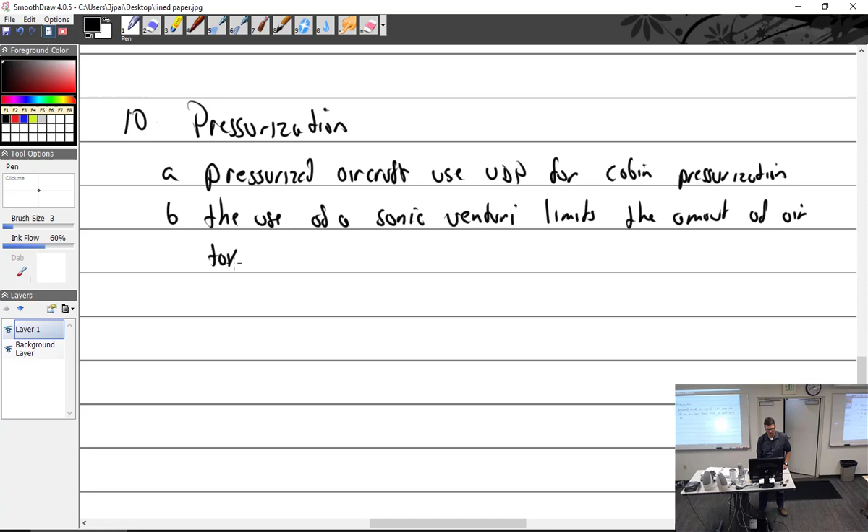Also, upper deck pressure may be used to pressurize magnetos.

So if you have a pressurized turbocharged aircraft, now you're talking about going high, especially if you have a pressurized cabin. Now you're really talking about engines capable of going high, people capable of going high. But the magneto, that's going to be the weak link, because as you get up in altitude and the air is really thin, the air is the insulator in the magneto. If you start losing that insulator, then it's not going to go to spark at the nearest tower. It can wander off and start misfiring all around.

I had a student, Juan, who didn't tell me, but I think he was like some sort of ferry test pilot for Beechcraft, because he talked about flying his Bonanza all over the world. I mean, he'd fly his Bonanza over to England. I'm like, how'd you get it here? He flew it. That's the wealthy one. Well, if you got a plane like that, you're wealthy. His name is Juan, I don't know, but yeah. I don't want to talk about his financial side here, but, where does he live? Yeah. But anyway, he talked about an aircraft, might have been his, at night over the Atlantic, and the thing started misfiring all over the place, and he started losing altitude fast. You have to wear one of those survival suits, you're allowed to take it off your shoulders, but I don't know who made that rule. But anyway, he's getting this thing on. He's going in the drink, and he was with somebody else, another ship, and he's telling him, man, I'm going down, just mark my position, start calling in, this is how it ends. And he got down really low, where the pressure started to increase, and boom, magnetos fired back off again. Now he's ruined a perfectly good suit, I'm sure.

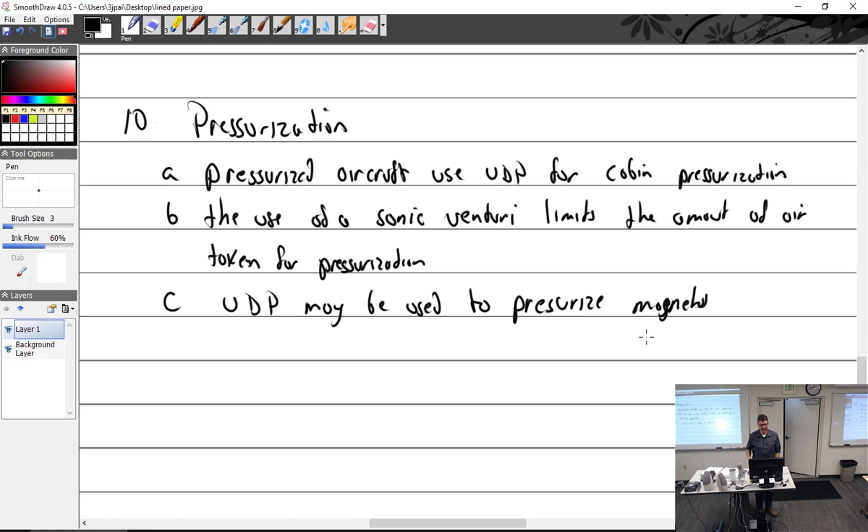What's that? How do you pressurize a magneto? Is it like a housing that goes over the top? Oh, actually, you take the same housing, glad you asked. Pretty much it's the same housing, and these are vent plugs. So you have two vent plugs, you take them both out. This plug here is going to have a smaller orifice now, and then this one will just have a fitting on it, a hose fitting, and that hose fitting just goes over to the outlet on the upper deck pressure. You just blast upper deck in here, pressurizes that, bleeds out of here. So yeah, it's really just a cap conversion.

All right, last item here.

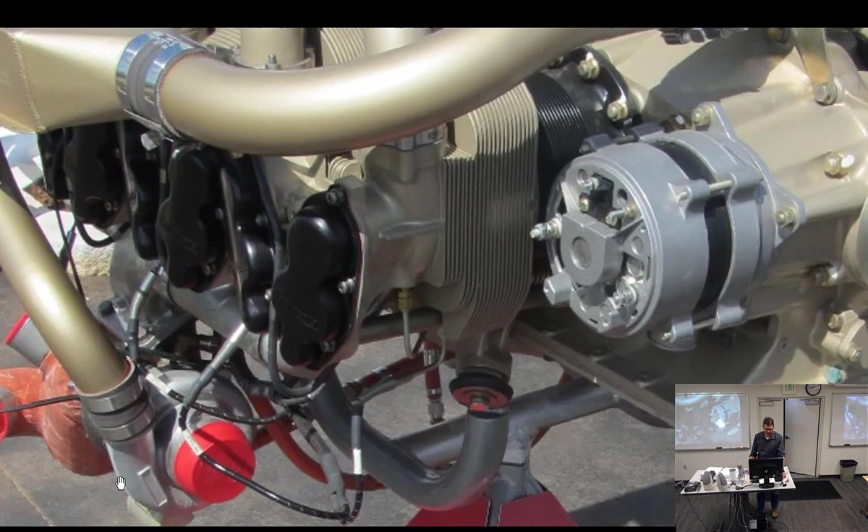Is there any problem with condensation? Yes, I almost thought about bringing it up, but yes, there is a problem with condensation when you do that, so you are absolutely right. What is this right here? Because it says right there, sonic venturi. Yep. So if you see that, that's going to the cabin.

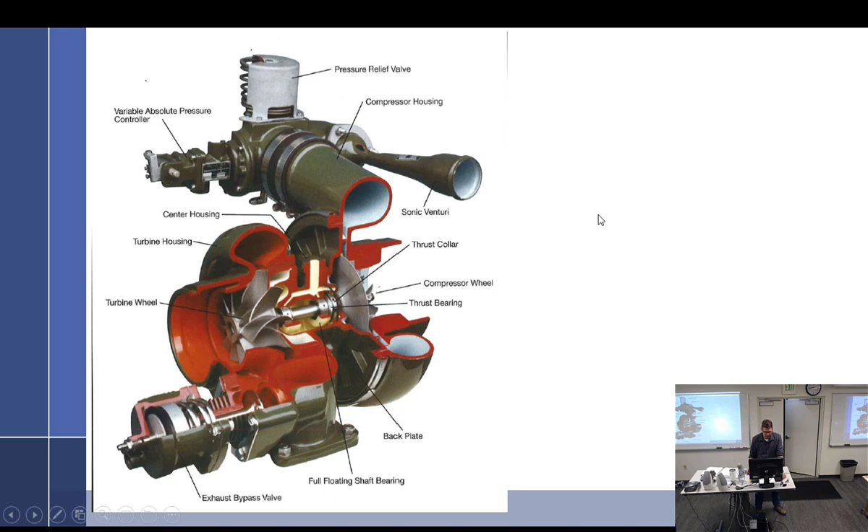I just know what it's going to do. There we go. Cabin pressurization, that's the main thing.

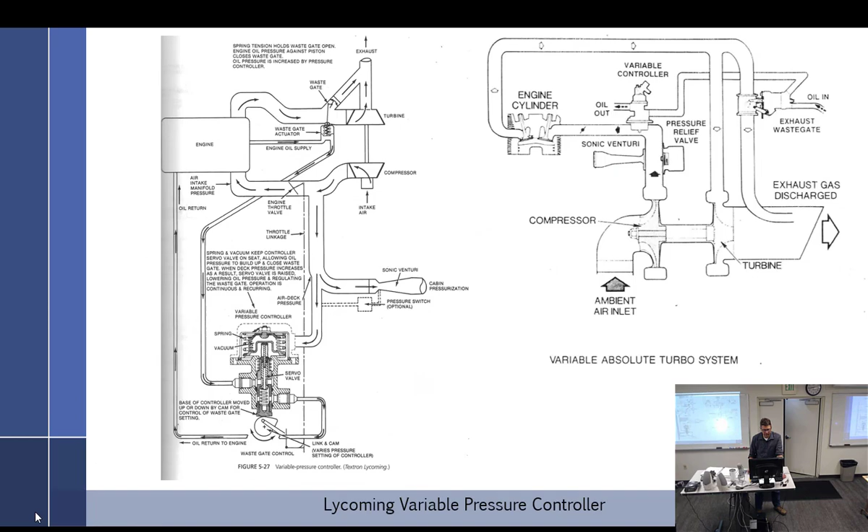How much pressure is in the cabin? It's not a lot. Are those cabins have special seals and stuff? Oh, absolutely. They're a pressurized vessel, so the windows are made for pressurization. All the inspection panels have screws, and they all have O-rings, a groove with O-rings. They're all O-ringed, they have gaskets. So yeah, the whole thing is sealed. Once that's established, there's not a whole lot of volume that goes in there, it just maintains the pressure. Yeah.

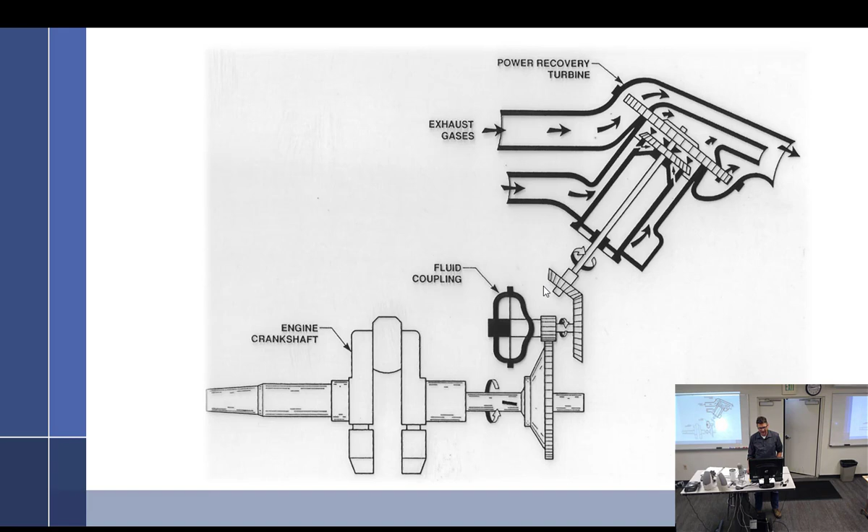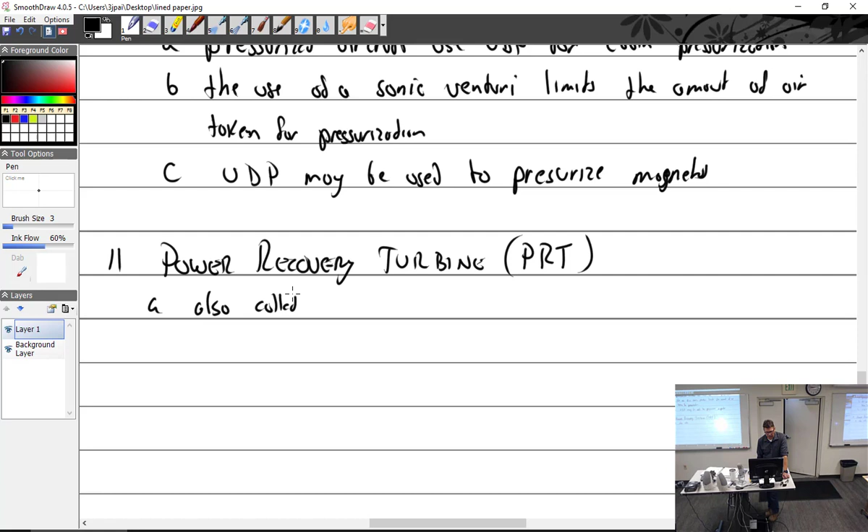Let's see, the 11. Power recovery turbine, or the PRT, also called the turbo compound engine. And that is a turbine wheel driven by exhaust gas, obviously.

The turbine wheel is directly connected to the crank through a coupling. And I think that's about all we need to know about that one.

As Phil would say, your gee-whiz information: I believe auto manufacturers are starting to bring this back, or did - I don't know what it is now, but at the time I wrote this several years ago, auto manufacturers are looking to revitalize this concept. Detroit Diesel uses a flywheel turbine on the DD15, I don't know exactly what that is, to add 50 horsepower and improve economy by 5%. The Ferrari used the PRT to drive a generator that electrically powers the wheels. I thought this was kind of cool. It's called a motor generator heat unit, or the MGU-H.

Here, the exhaust turbine, compressor wheel, and generator are all mounted on a common shaft. So you have a turbo driven setup with a generator. The recovered electrical energy goes into a battery pack, a regenerative battery, which powers the wheels out of a turn through a second device called the motor generator unit kinetic, or MGU-K. The generator can also operate as a motor to preemptively spin the compressor to eliminate boost lag. That's your Ferrari.